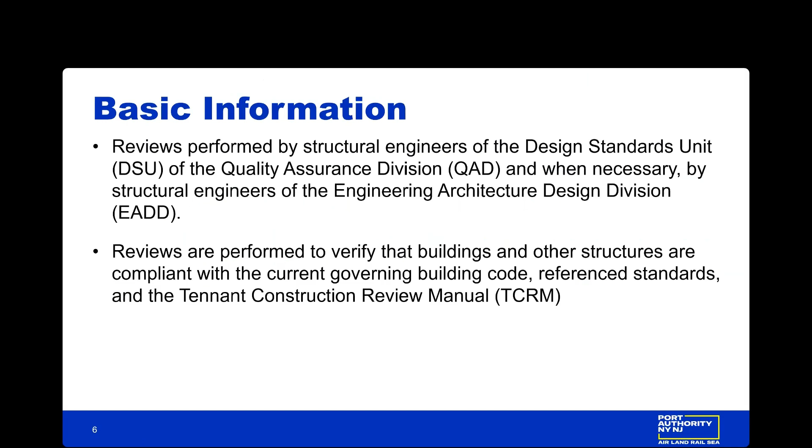The current codes enforced by the Port Authority are the 2021 International Building Code New Jersey Edition, the 2020 Building Code of New York State, which is based on IBC 2018, the 2022 New York City Building Code, which is based on IBC 2015, and the 2025 Tenant Construction Review Manual.

Codes are specific to the locations of the PA facilities. You can go to the next slide.

In New Jersey, we use the New Jersey edition of the IBC. In New York State, we use the New York State edition, but that does not include New York City. New York City has its own building code, and we're currently on the 2022 edition of the New York City Building Code. Next slide.

Each of these codes also references standards. For example, the New Jersey Code references ACI 318-19 for concrete design, ASCE 7-16 for design loads and other design criteria, and then AISC 360-16 for the steel design.

If you're a structural engineer, you'll know the specification. The 2016 steel specification is in the 15th edition of the AISC Steel Construction Manual. That's the light blue book with the silver lettering. Next slide.

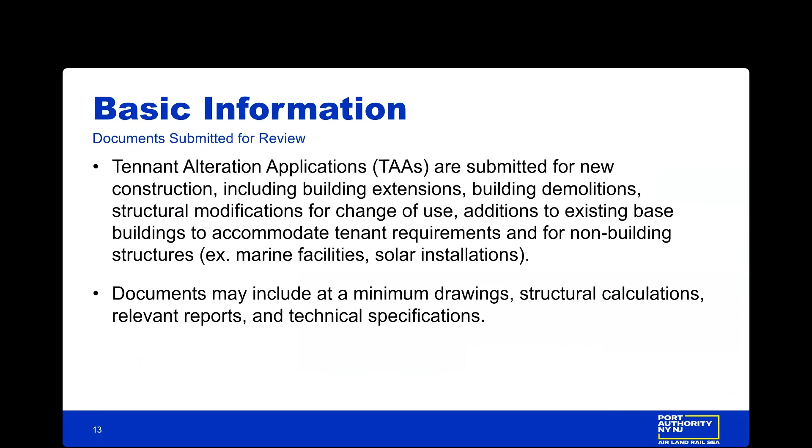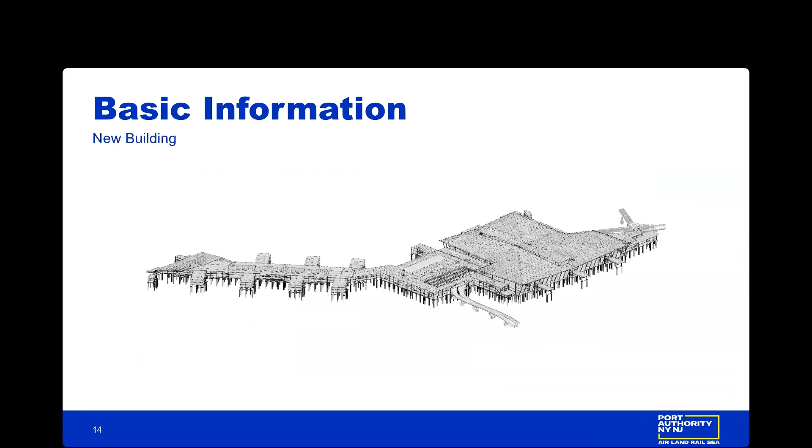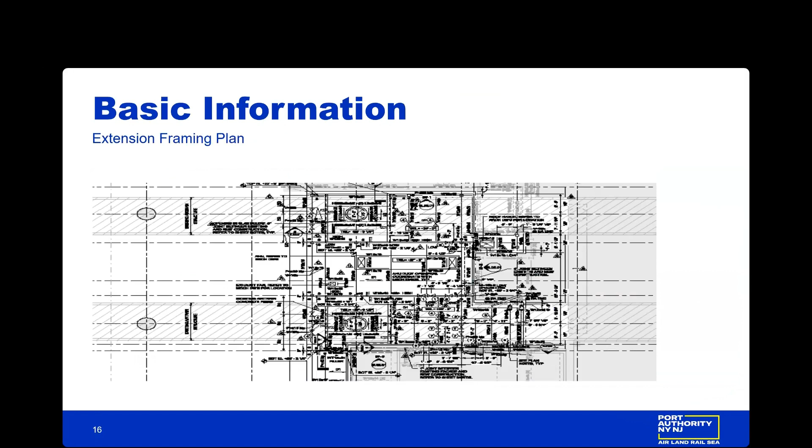Next slide. We review new building construction. Next. Extensions to existing buildings. Next. Extensions to framing. Next. And structural details for tenant fit-outs. That would include any modification to the existing structure, and the majority of TAAs would fit under that category.

So for the submittal package, what's included in the submission? You can go to the next slide.

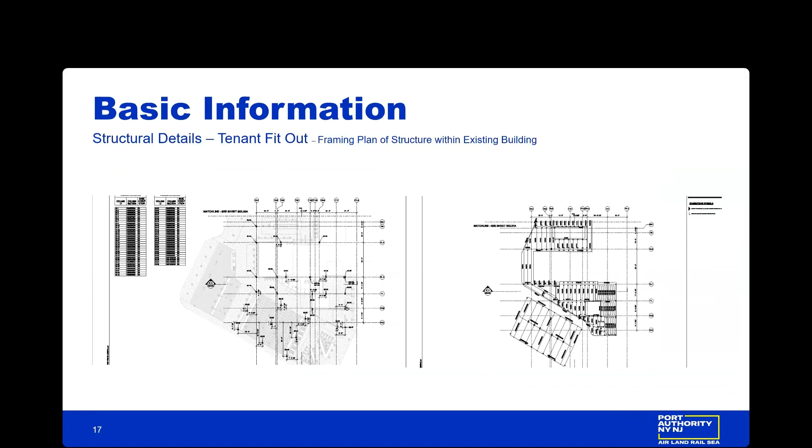Provide documents necessary to demonstrate that the design submitted for review is code compliant and satisfies PA project requirements. We're not limiting you to anything in particular, but typically that's going to include calculations, drawings, reports, and technical specifications. It's important to indicate the applicable building code for the jurisdiction on the submitted documents. We already went over the current codes, and also the appropriate reference standards, which would include ASCE 7, ACI 318, and AISC 360. Verify and indicate on the submittal documents compliance with the 2025 TCRM.

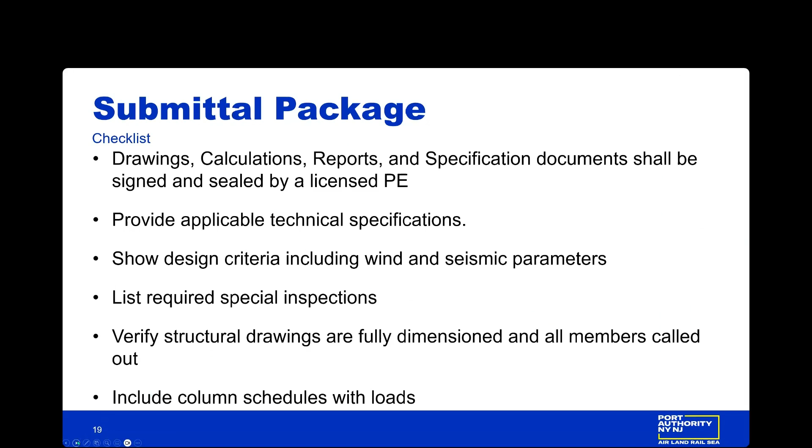All the design documents need to be signed and sealed by a licensed PE. Include applicable technical specifications, show design criteria, such as wind and seismic parameters, list the required special inspections, verify that the structural drawings are fully dimensioned, all members are called out, include column schedules with loads. Next.

Verify with calculations that existing structure and foundation can safely support additional loads from new construction. For renovations and additions, note all the assumptions made.

Verify adequate support for mechanical equipment. Provide calculations for mechanical equipment that exceeds 1,000 pounds.

Verify that the partition walls are adequate to resist horizontal loads. Provide seismic bracing for sprinkler piping systems in accordance with NFPA 13 and ASCE 7-16.

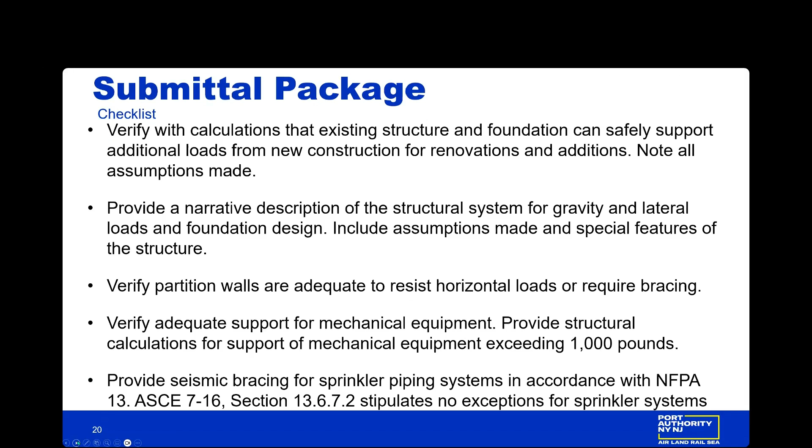So the review process—what happens after the documents are received by QAD? QAD's primary function is to review for code compliance.

The review also checks compliance with design standards and regulations referenced in the building code. As mentioned before, that would be standards such as ASCE 7 for minimum design criteria, ACI 318 for concrete design, and AISC for steel design. But there are others, and those would be listed in Chapter 35 of the respective building code.

Submissions are also reviewed for compliance with the general requirements of the TCRM. The goal of the review is to audit the design documents for compliance with code requirements and issue a recommendation for approval to construct without comment as soon as possible.

But except for simple alteration projects, it is not common for the initial submittal to be a fully compliant set. There's usually at least one or two comments.

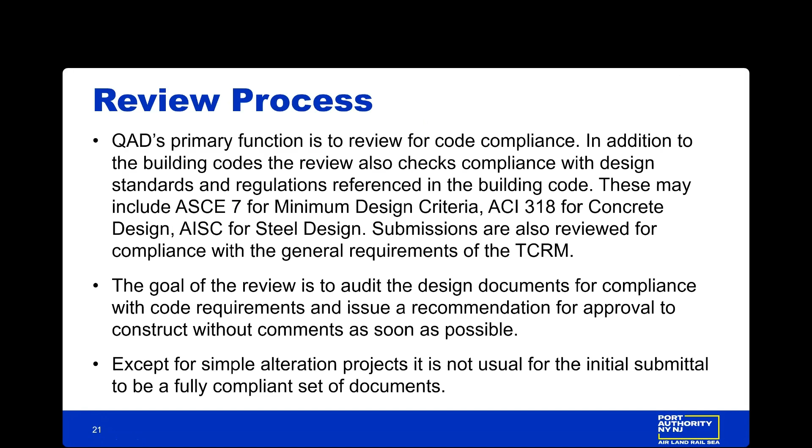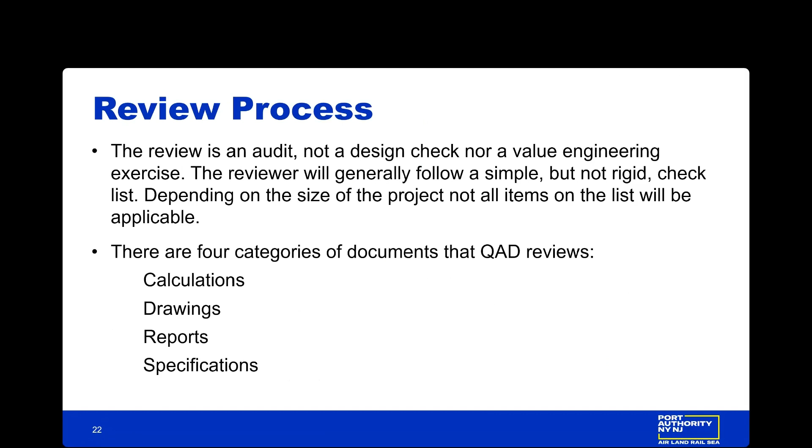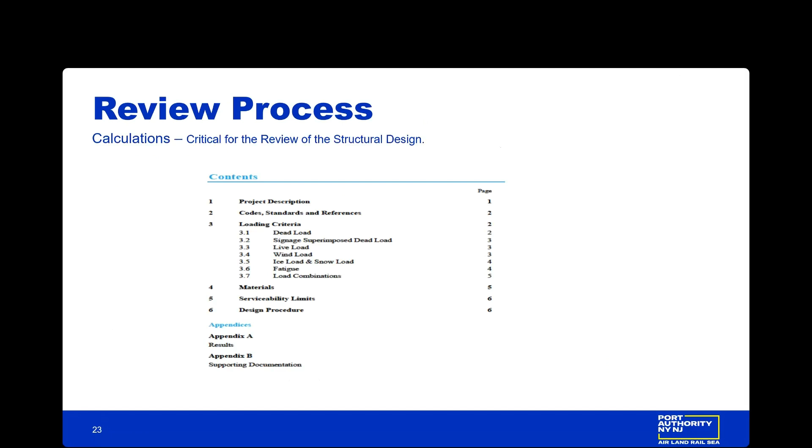Calculations are critical for the review of the structural design, and the calculation packages will vary depending on the size of the TAA and what's included in the design.

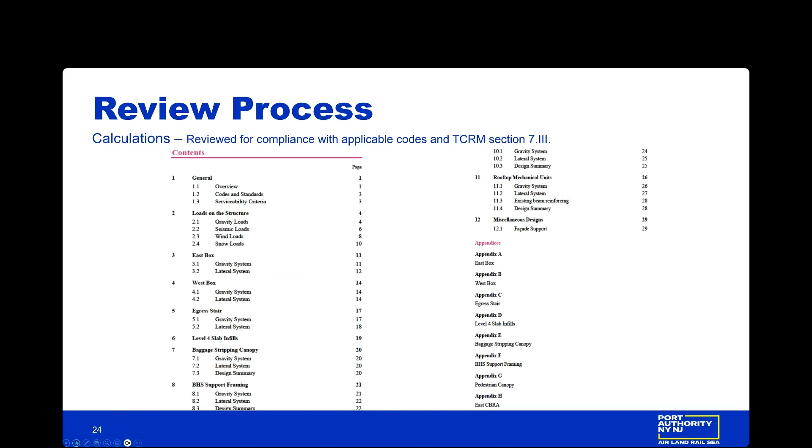The calculations are reviewed for compliance with the codes and standards and also TCRM guidelines. TCRM section 7.3 lists the requirements of what needs to be included in the calculations.

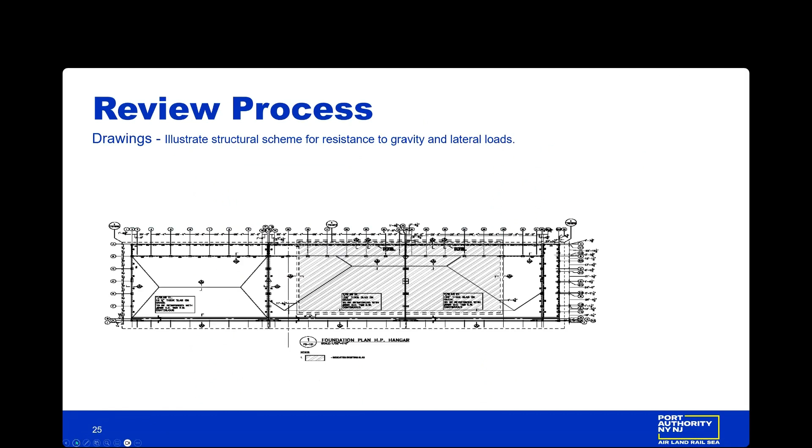The drawings will illustrate the structural scheme for resistance to gravity and lateral loads. We review for the gravity and lateral systems.

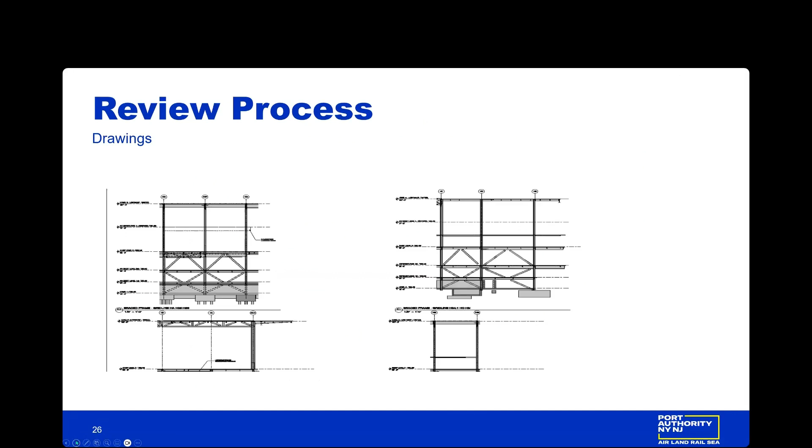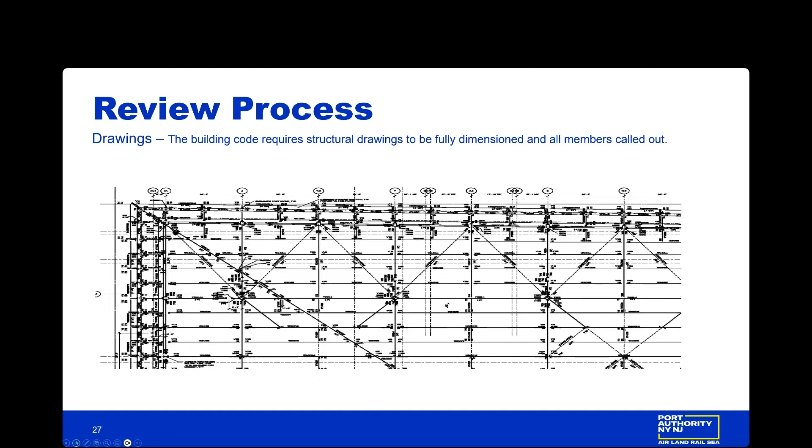We also review details and sections that are provided in the structural drawings. The building code does require structural drawings to be fully dimensioned and all members called out.

The structural review is not limited to the structural drawings themselves. There are structural elements on the mechanical plans, and we verify that the equipment is properly supported.

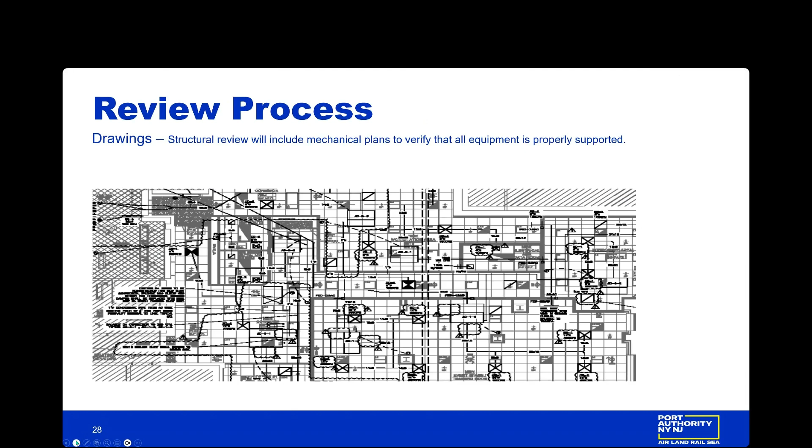Sprinkler systems are also reviewed for the inclusion of seismic bracing.

We do review reports such as basis of design reports, peer review reports, geotechnical reports, and wind tunnel reports when applicable.

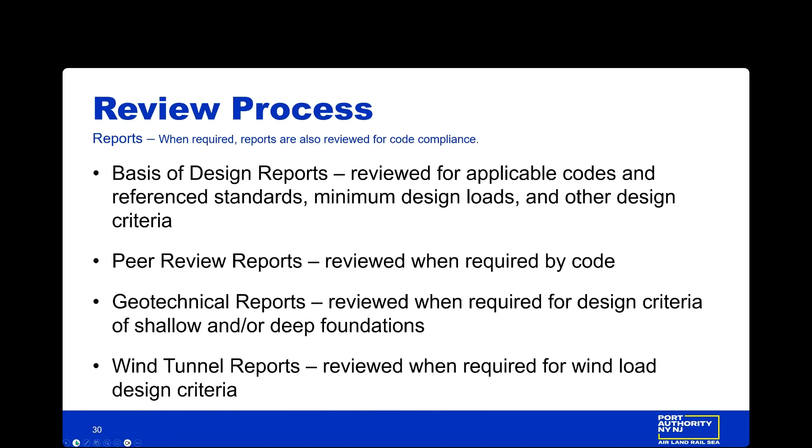As mentioned before, technical specifications that are relevant should be included. They are also reviewed for code compliance and compliance with the reference standards.

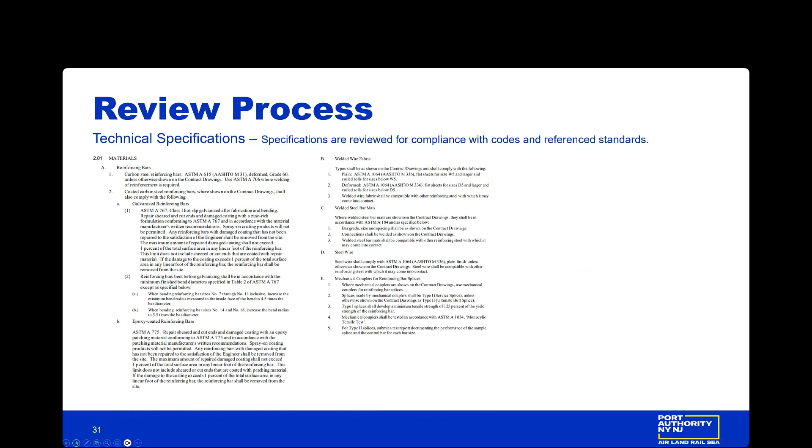Some of the common comments that come up during the review process—most commonly, the comment is probably related to missing or incomplete information.

It's important to provide a narrative of the structural systems and sufficient calculations to demonstrate the stability of the structure with both the gravity and lateral loads.

We're looking for detailed calculations, but we're not looking for just computer printouts where we have thousands of pages of computer information that we need to go through. We're looking for something clear and concise.

If you have computer printouts, we recommend that you organize them in an appendix. It can be helpful to have a key plan and make it easy for the reviewer to find relevant information for the structural system.

The building code identifies the categories of buildings for which an independent structural peer review is required. Also, a key element analysis may be required as spelled out in the building code for single element supports that are more than 15% of the building area.

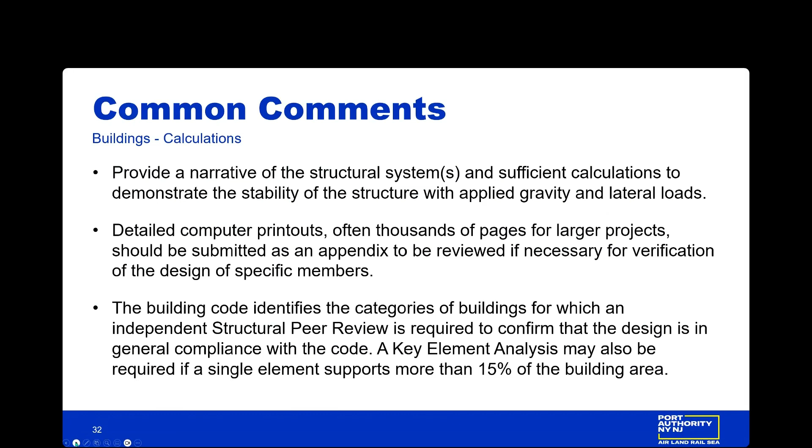Some of the things we check for in structural calculations would be a list of applicable codes and standards, design criteria, design loads and load combinations, a descriptive summary of analysis and design for gravity and lateral systems, deflections and drifts, and sufficient calculations to demonstrate the stability of the structure under applied gravity and lateral loads.

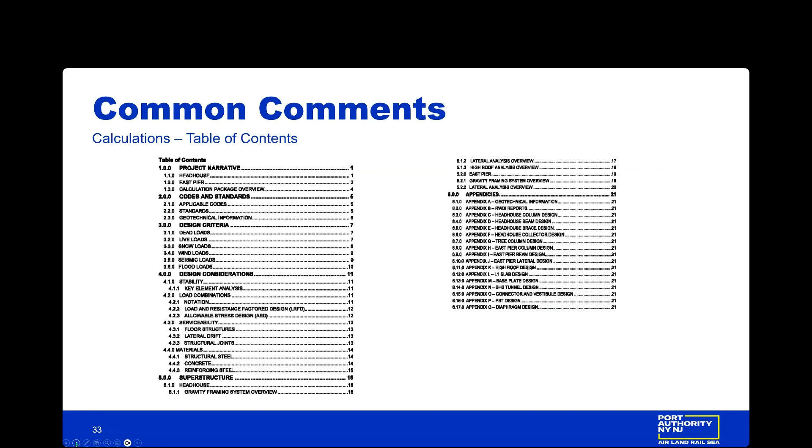As mentioned before, it is helpful to provide a key plan in the calculations just to make it easy for the reviewer to find relevant information.

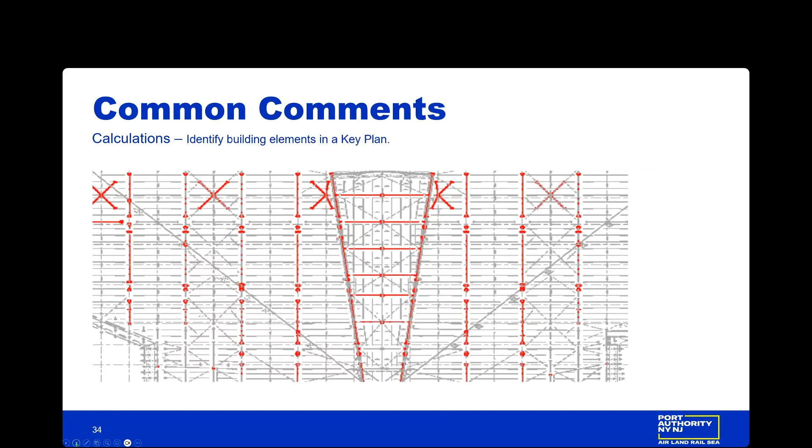The drawings need to illustrate the structural scheme for resistance to gravity and lateral loads. Drawings need to be fully dimensioned, a complete structural scheme, with all structural members identified in the structural system supporting the gravity and lateral loads.

Include design loads, geotechnical information, required special inspections, and if there's foundation work, include the foundation details. Show the frost depth for shallow foundations, and for deep foundations, we need the pile types, capacities, and lengths.

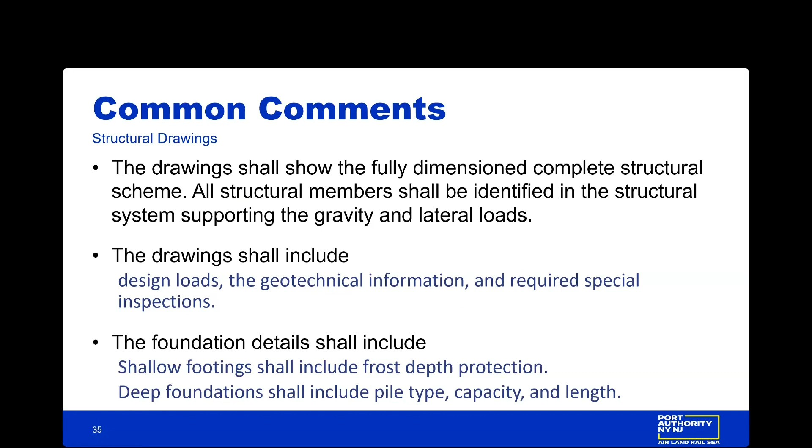In the general notes on the drawings, show the code mandated structural design information, loads, wind and seismic design data, and geotechnical information. Include a list of required special inspections.

New York City does require that demolitions have special inspections, but relevant to most projects would be the steel inspections for welds and for high strength bolts.

One that's often missed is the required special inspection for cold-formed steel construction.

Concrete has requirements of special inspections, and also post-installed anchors require special inspections.

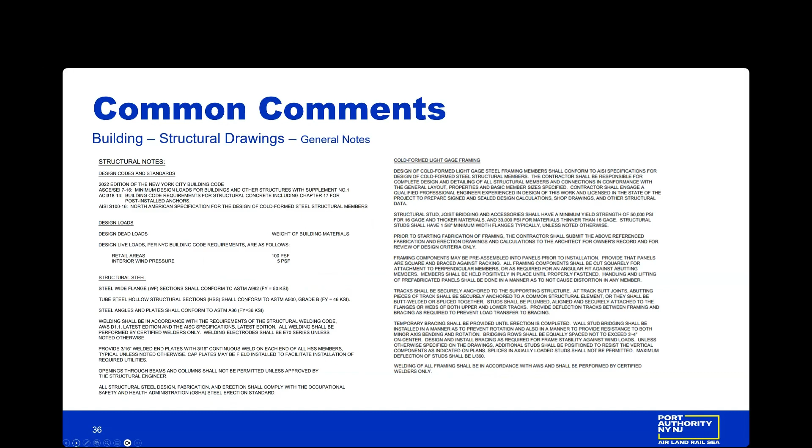As I mentioned before, it's important to fully dimension framing plans and make sure all members are identified.

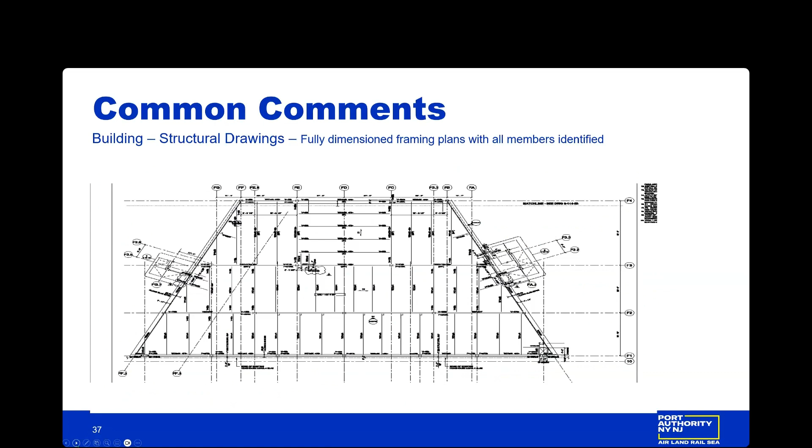For foundation work with shallow foundations, submit a copy of the geotechnical report.

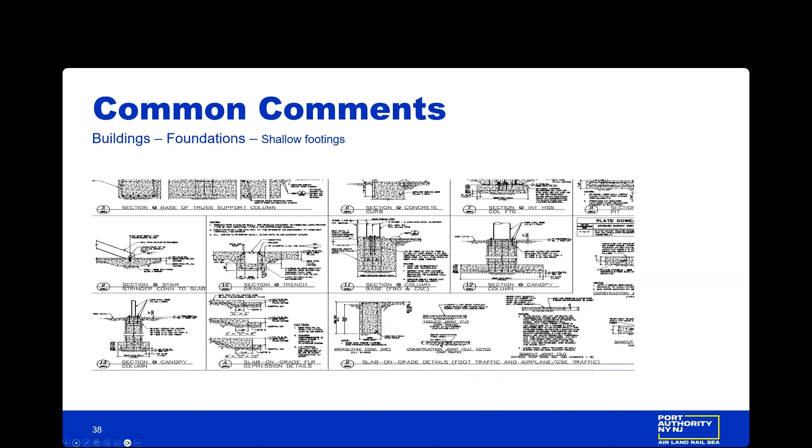Also specify frost depth and verify footings are protected from frost in accordance with the building codes.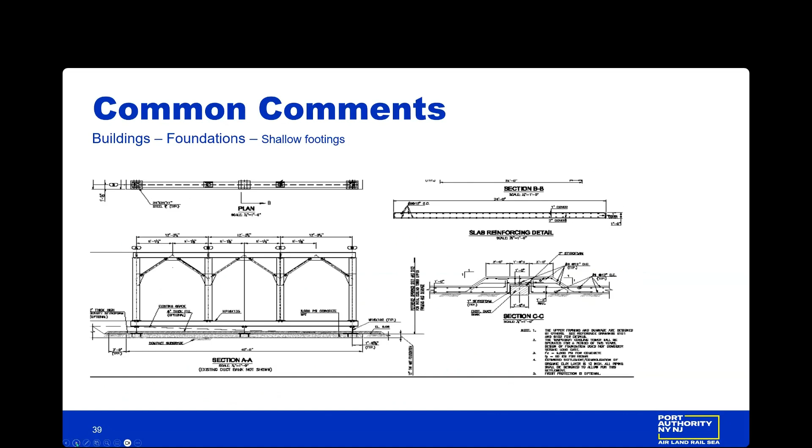If there are deep foundations, we need the specified pile types, the allowable pile loads, and when required, identify piles to be tested to verify pile capacity.

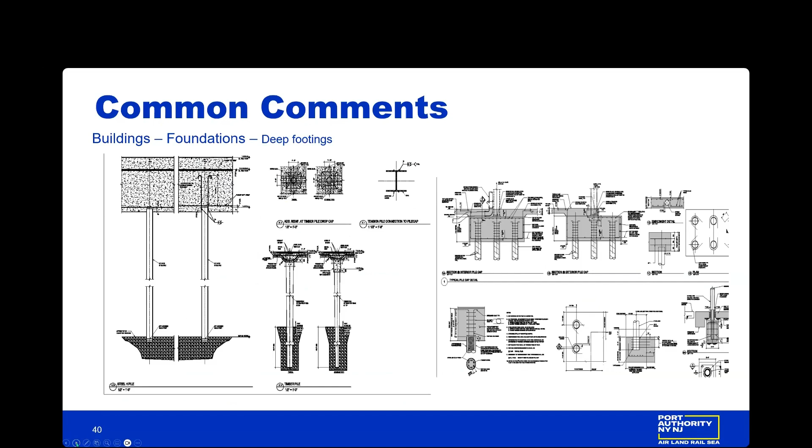Regarding the foundations, it's good to coordinate the foundation with the column schedule and show the loads from the column schedule into the foundations.

For alterations to existing structures, for mechanical equipment, indicate on the drawings the support of mechanical equipment and provide structural calculations for additional load on existing structure.

Alterations to existing slabs: slab cuts, core drilling, and trenching must be indicated on the structural drawings. Provide calculations for any required reinforcement of existing structure.

Do not delegate code compliance to contractors. If coring or slab cutting needs to be done, it needs to be shown on design drawings.

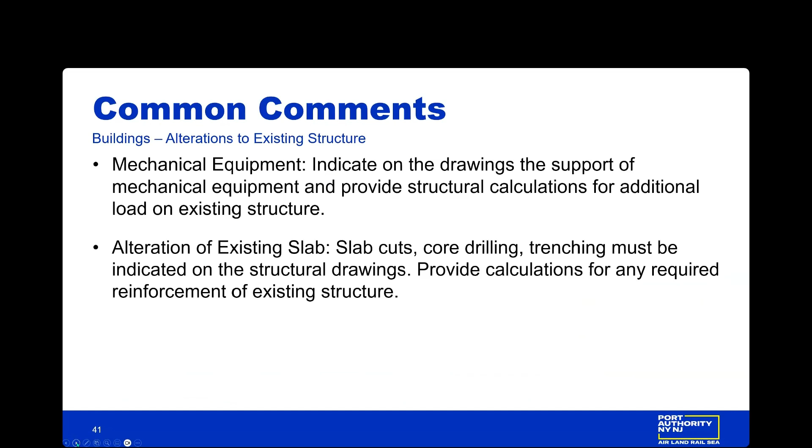Non-structural components are also reviewed for compliance with the code. That would be ceiling systems, partitions, and sprinkler systems.

The sprinkler systems are part of the life safety infrastructure, so they're a vital part of the building, and they need to be braced for seismic loads.

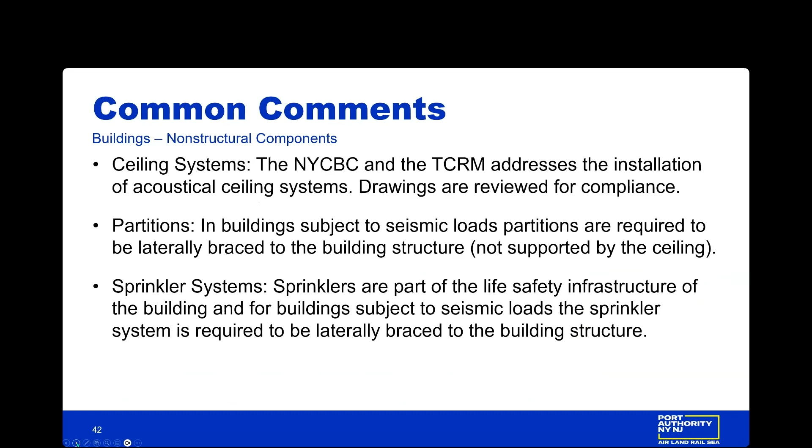Delving into that a little bit more, for the ceilings, the 2022 New York City Building Code has some very specific requirements for hanging ceilings. That's in section 808 of the code and also Appendix R, so pay special attention to that. The TCRM does not allow powder actuated fasteners for ceilings or ceiling hangers.

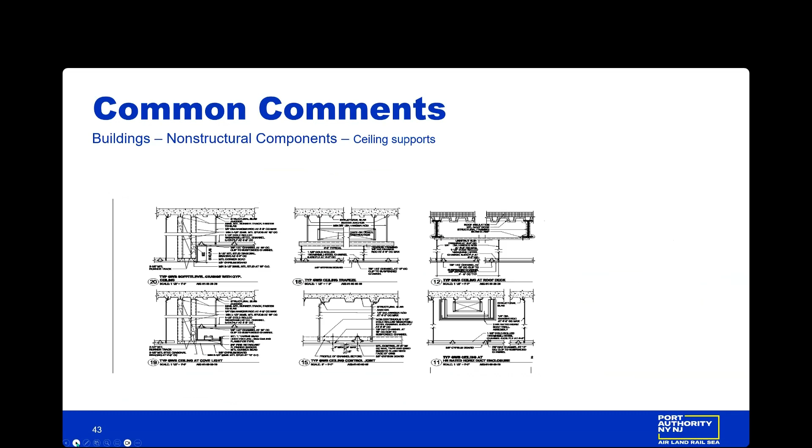Partitions need to be supported and laterally braced according to the code. Check bracing requirements for partitions exceeding 6 feet in height. That needs to comply with the IBC code and also ASCE 7-16, section 13.5.8.1.

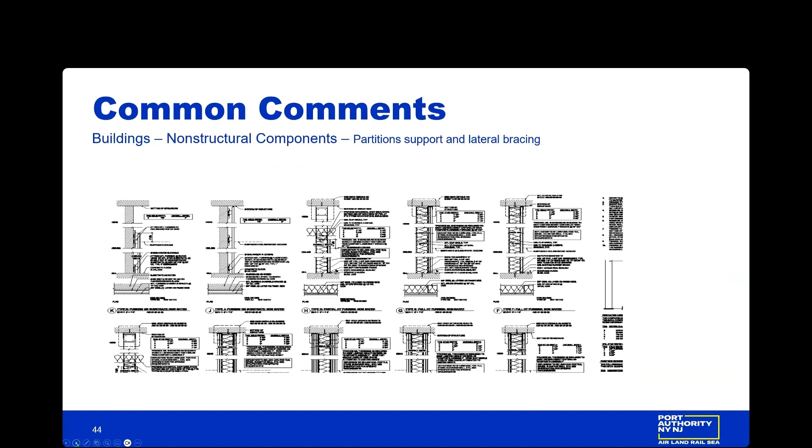Partitions need to satisfy the minimum lateral load requirement of 5 pounds per square foot.

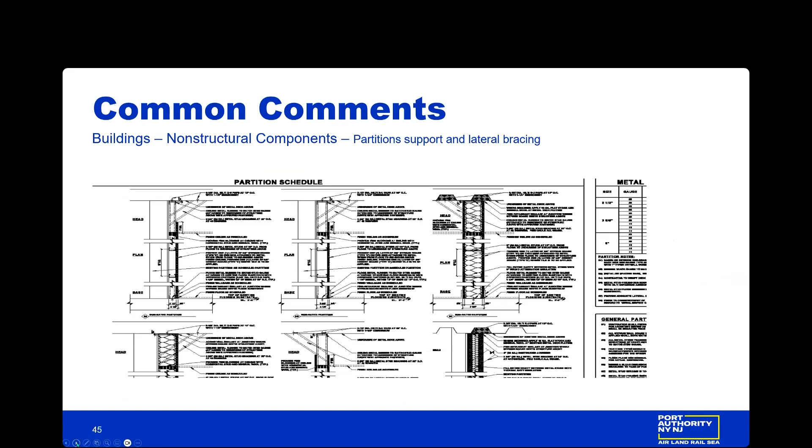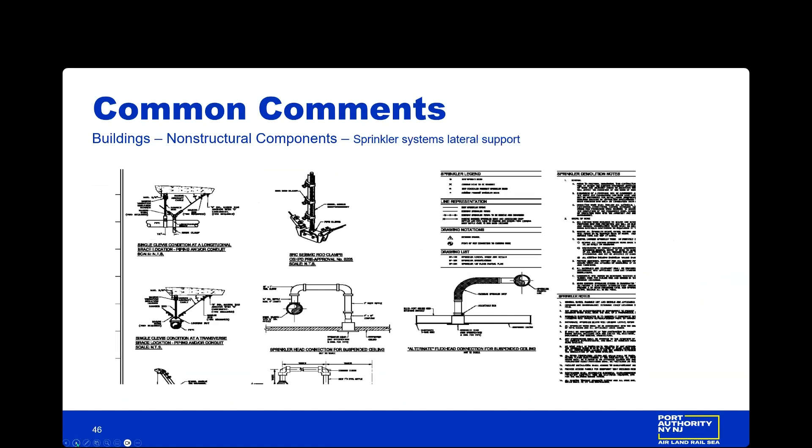As I mentioned before, sprinkler systems also need to have seismic bracing, according to ASCE 7-16, section 13.6.7.2 and NFPA 13.

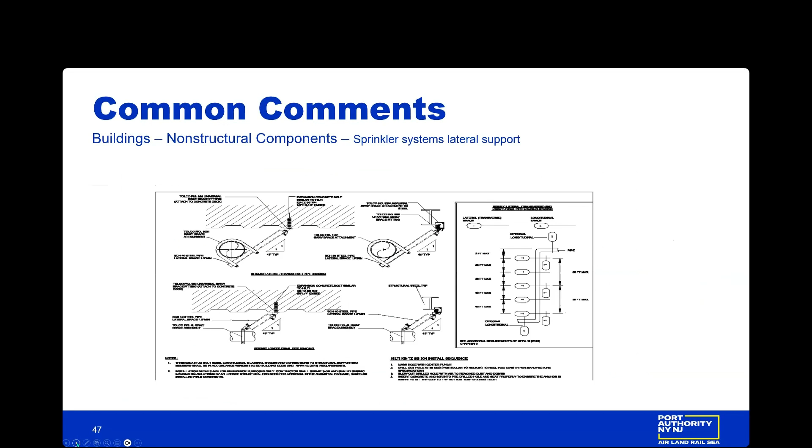Some keys to success: the reviewer is not an adversary and is available to discuss and assist in the resolution of comments. Understand the intent of the review is for code compliance, and it's helpful to anticipate the reviewer's needs and make it easy to locate needed information.

The requirements of the building code, reference standards, and the TCRM will dictate the methodology of the review. Present information with the intent to verify that the code requirements have been satisfied.